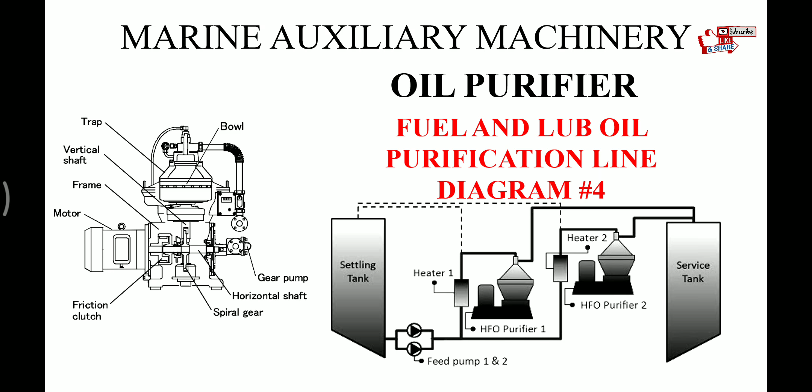So friends, this is the line diagram for the oil purification. From A this is the line coming from the settling tank. The supply pump takes suction from the settling tank and supplies oil to the heater, where oil is heated by steam and fed to the purifier by this cylinder valve, a three-way cylinder valve. As we can see from here, it is the feed valve or cylinder valve.

Then it is sent to the purifier by this manual control valve 12, and after purification is done, then through this manual control valve 13 it is sent to the service tank. B is going to service tank, and settling tank from A, from settling tank it is coming to A, and from G it is again going to settling tank.

This recirculation line to the settling tank is provided to maintain the pressure in the purification line, so that excess oil can be returned back to the settling tank.

When purifier is not running, that is during desludge operation or during starting, this feed cylinder valve will divert the fuel to this settling tank again instead of sending it to the purifier. So this is the basic line diagram for the purification system.

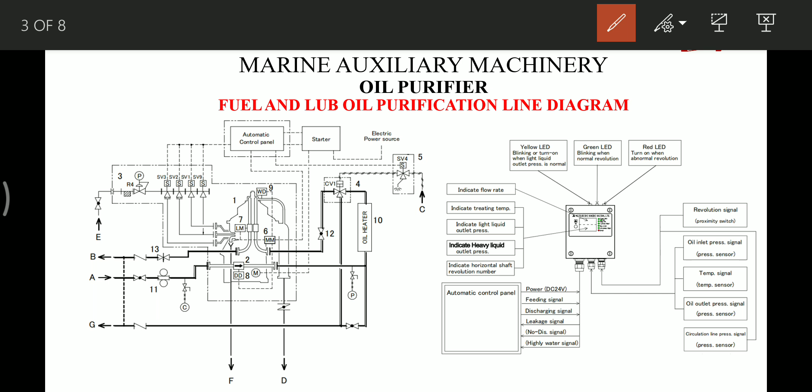Now let's first see the multi-monitor system. The multi-monitor system basically takes signal from different sensors installed in the purifier. First is the discharge detection function, a sensor that monitors the revolution of the purifier horizontal shaft, and this sends signal to the multi-monitor function.

And in case the RPM is not correct during discharge or at running condition, then it sends signal to the automatic control panel. Then the other sensor installed on the purifier is water detection.

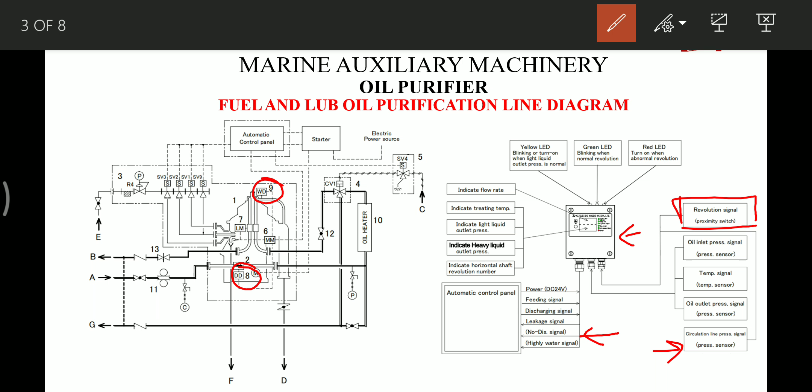This water detection sensor actually measures the recirculation pressure in the system. It functions in two ways: one, in the clarification mode, where a small circulating line is provided to circulate the inlet oil flow in the system, and the back pressure is monitored by this water detection sensor. In purification mode it basically detects the water pressure and desludges accordingly.

The third thing is this leak monitoring system, the pressure sensor. This is actually the oil outlet pressure sensor, and it senses and sends signal to the multi-monitor system.

So in case the bowl is not sealing properly, then the outlet pressure will be less, and in that case it will send signal to the multi-monitor detection system. So these inputs to the multi-monitor system are sent to the automatic control panel, like no discharge signal, high water signal, and leakage signal.

Then accordingly this automatic control panel takes decision and sends discharge signal or stops the purifier, or during starting operation it sends signal for feed operation, feeding oil to the purifier. Now let's see how this automatic control panel basically works.

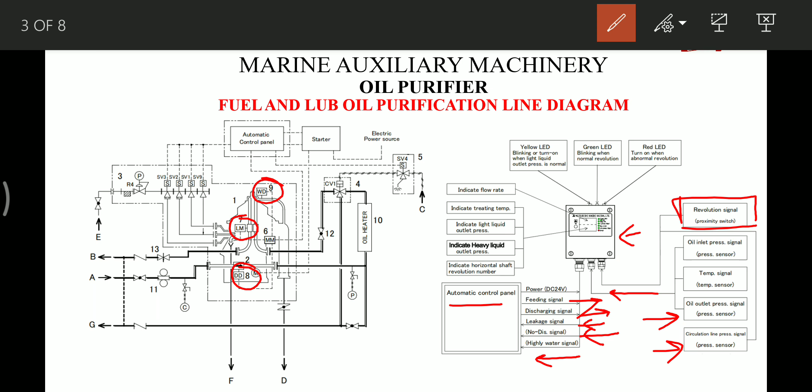During starting, when RPM is reached, the discharge detection sensor, that is the proximity sensor, detects the RPM of the horizontal shaft, and after the RPM is reached and current in the purifier motor is okay, then the cycle is initiated, that is the purifier operation cycle is initiated.

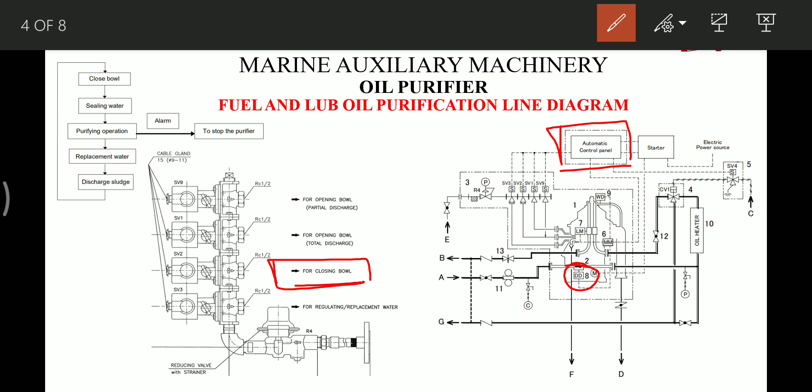First the closing bowl water is sent, that is this solenoid valve sends water so that the bowl can be closed. The closing mechanism we have already seen in our second video, which is on the bowls. So after this closing water is sent, the bowl is closed.

Then once the bowl is closed, the sealing water is sent by this solenoid valve. After the sealing water is sent, the automatic control panel initiates desludge operation, meaning it opens the bowl so that anything inside the purifier can get cleaned.

So this total or partial bowl opening is done, and then again the bowl is closed, and sealing water is provided to the purifier again. Once the sealing water is provided, the automatic controller sends signal to this solenoid valve, which operates the cylinder valve, and feed signal is given to the purifier.

After this feed signal is given, oil is supplied to the purifier, and all the sensors come into action. If the purifier operation is normal, that is everything is running normal, then after a set period of time the desludge operation will take place.

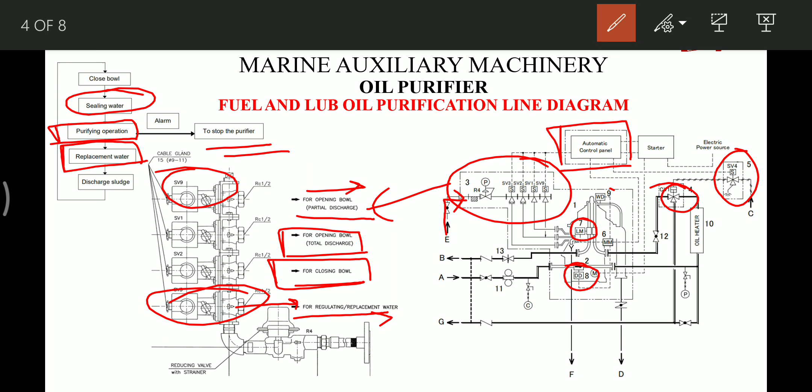So this is how the operation of the purifier takes place. Now let's see the actual line diagram which is there on board ship.

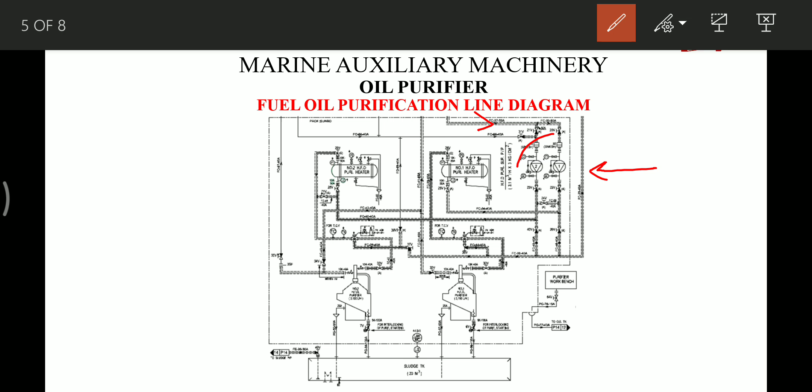This line which is coming over here is actually coming from the settling tank, and these are the two supply pumps provided on the ship. Pump number 1 provides inlet feed to heater number 1, and pump number 2 provides feed to heater number 2, and there is an interconnection valve which can be used for interconnecting these two pumps for either of the purifiers.

Pump number 1 can be used for purifier number 2, and pump number 2 can be used for purifier number 1, and either one pump can be used to run both the purifiers, in case they are able to provide sufficient pressure.

As I mentioned before, recirculation lines and recirculation valves are provided, and this line is again going back to the settling tank, as we saw in the first slide. These valves are provided to maintain pressure in the system. The oil heaters have a safety valve - if the line pressure on the purifier side is more than the set pressure of the safety valve, then oil will leak and go to the overflow tank or the sludge tank, depending on the line diagram.

Then that becomes a very big issue, because we have to search here and there to find from where the oil is leaking. So for operation purposes, what I have felt is that these two valves, when we are managing purifiers, we should just set once and not try to adjust pressure again and again using these valves, because if we wrongly set these valves, there will be a leak from the heater safety valve.

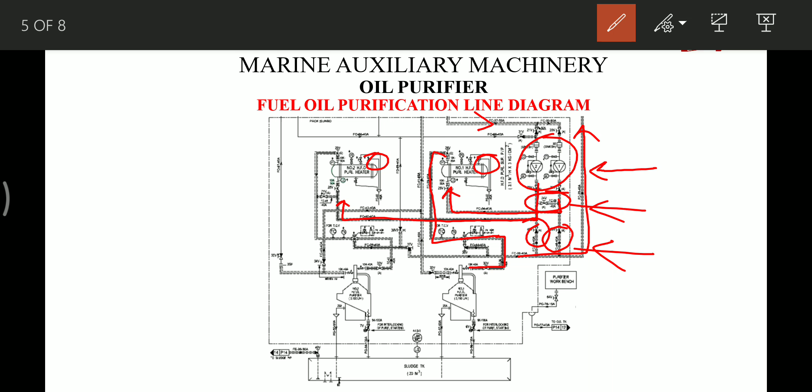After the fuel is heated in the heater, it is sent, fed, to the purifier through this feed cylinder valve, which is pneumatically operated by a solenoid valve, controlled by the automatic controller. This three-way valve is again recirculating oil to the return line to the settling tank, and the outlet is sent to the service tank, as we can see by this line.

So friends, this is the line diagram for the HFO system. Similarly, we have a line diagram for the diesel oil system. This thin line is for the diesel line. The dotted line for the HFO shows the lagging, so that heat is not lost. This thin line shows diesel.

Similarly, the diesel line is connected at the same location, and these pumps can take suction from the diesel tank. This diesel line is provided only for purifier number 2. So only purifier number 2 can be run by this system, because if we want to run purifier number 1, that pump is not provided with this diesel oil connection. But by using the interchange valve which is there, we can run both purifiers with this diesel line.

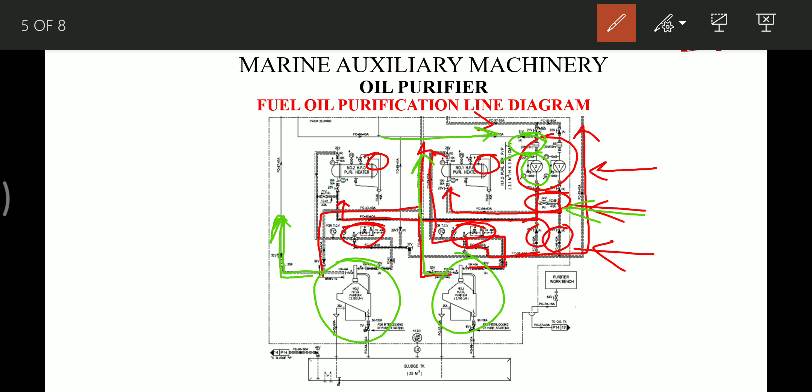But the thing is, that is also not possible, because there is no outlet from the purifier to the diesel oil tank. As we can see, the purifier outlet only goes to the service tank, not to the diesel oil tank. So purifier number 2 can only be used for purifying diesel oil, in which case we don't need to use the heater.

The other thing about heating of fuel oil is that it is done automatically using PID controllers. The last thing I missed is the sludge tank, which is provided just below the purifier - during the sludge operation, the sludge is sent to the sludge tank.